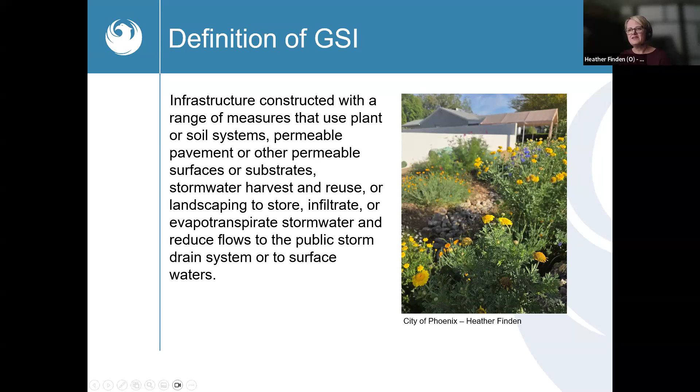Okay, that sounds great, let's go ahead and do this. But what benefit does it provide? Well, it actually provides a whole litany of co-benefits for the area in which it is installed, which are things that we absolutely want to be addressing in and around the city of Phoenix, to respond to our changing environment. First and foremost, it has a variety of environmental benefits. We're going to have more shade that's going to promote cooler localized temperatures.

It's going to help with that urban heat island effect. It's going to improve air quality. And it's going to allow more individuals to get out there and recreate and want to be in these outdoor spaces because it's more comfortable to do so.

For the wildlife in and around us, it's going to be supporting vegetation that's going to attract pollinators, birds, hummingbirds, bees, the monarch butterflies that we want to have. It's going to really promote and support a lot more biodiversity of this wildlife.

And from a water perspective, it can help improve localized flooding. It can help you reduce your reliance on potable water for irrigation, and it can help filter stormwater pollutants that would otherwise be picked up and transported as water runs over these impervious surfaces, down the roads, picking up oils, chemicals, and fecal material, the doggy poo that's not picked up. All of those things—it's really going to help improve that stormwater quality.

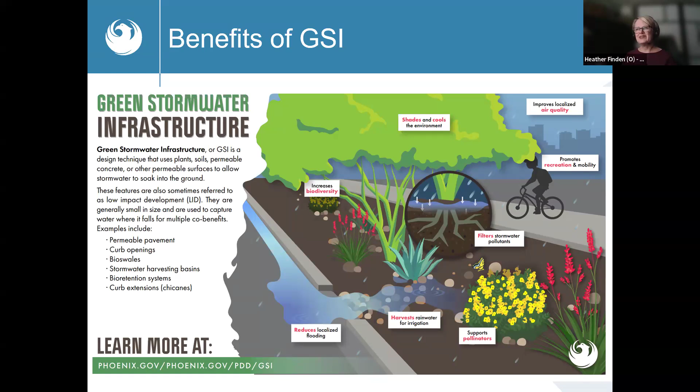Because unlike most other cities, especially on the East Coast, we have a separate stormwater system. The rainwater falls onto the ground, goes into a catch basin, if you're lucky to have those in your neighborhood, and goes into the storm drain pipe and is discharged directly to the Salt River. There is no treatment involved in that at all. So that's why having something like this in place can absolutely have lasting effects, not only on your site, but as it continues on its journey to the Salt River.

So here are the range of measures we are going to be talking about today. I know all of you are probably going to want to say, yes, I want to do it all, but I don't have $50,000 or an endless budget and time, energy, and effort to do that. But that's why they're considered a range of measures.

So what we're going to be looking at today are ways that you can install green stormwater infrastructure or rainwater harvesting systems in and around your home for your benefit. There are going to be two areas that we're going to be looking at: the area that is on your private property, and then another area, especially in some historic districts, that we kind of call a landscape strip.

It's this little detached area between the sidewalk and the road, and again this is more prevalent in some of the older homes. That's more often than not actually considered city right of way—it's under the city's ownership, but it's the residents' responsibility to take care of it. Now, if that wasn't confusing enough, we'll talk about it more. So those are the two areas we're going to talk about when you're looking at water conservation in and around your home.

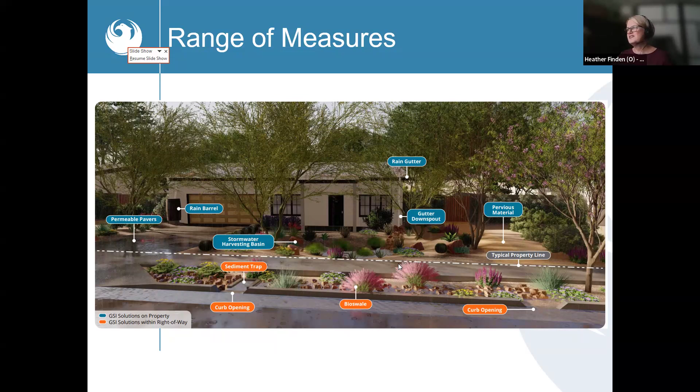Again, I know you said you want to do it all. I can feel it.

But there are some basic questions you can ask yourself when looking to incorporate these in and around your home. Most importantly, what is your budget? How much do you have to spend, how much do you want to spend? You don't have to do it all at one time—these can be projects undertaken over time. And most of them, if not all, are technically do-it-yourself projects, but some of them can be a little bit more tricky, when you might want to hire a contractor to do the work for you.

I am very happy to see that there are a lot more landscape architects becoming more familiar with this, actually reaching out to us at the city to get guidance on ways they can incorporate these features into residential properties they're working on. So that's really exciting. And then again, we're going to look at the space—what do you have to work with?

What we want to do is make sure these features are not directly adjacent to the house. The last thing we want to be doing, especially with some of the soils in and around Phoenix, is to put a lot of water or direct water right next to the foundation of your home. So a general rule of thumb is to have it about 10 feet or so away from structures if we're going to be capturing and allowing water to infiltrate. But these are the best places where the water is going to be falling and running off, so it's a little bit of a dance there.

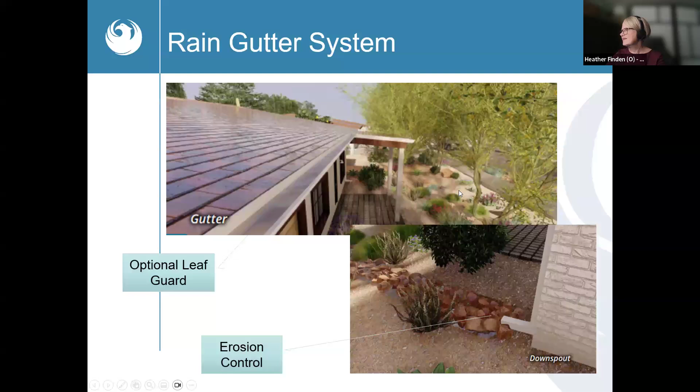Okay, the next one is, I don't want to say it's contentious, permeable hardscapes. One of the key components of green stormwater infrastructure is reducing the amount of impervious surface in and around your home. So instead of having a concrete driveway, concrete walkways, concrete next to an asphalt road, next to a concrete sidewalk, what you're doing is putting in surfaces with small voids in between, or the materials themselves are permeable, which allows water to infiltrate into the ground instead of running off down the site, flooding your yard or going out into the street.

These are really good solutions in smaller areas for retrofit projects, or if you're redoing your landscaping, usually your driveways, patios, areas that are not going to be heavily trafficked. The city does not allow them in the right of way, so that is unfortunately not going to be an option for this one.

But they're really great at reducing pollutants and assisting with flooding issues. So it's generally a very easy solution. You do need to do some preparation, instead of just slapping them down on the ground or subsurface. I could show you some resources on scarifying and disturbing the surface underneath and providing a place for all of that rainwater to run.

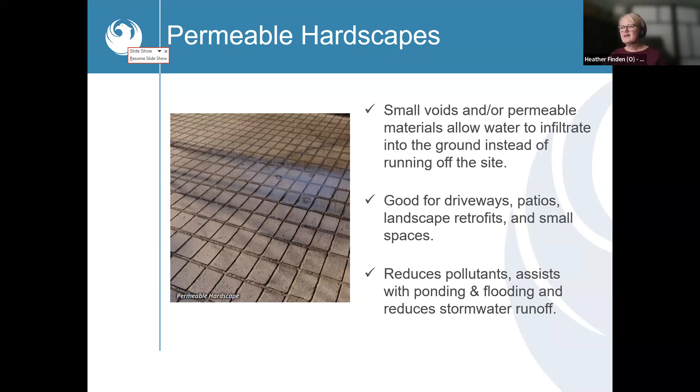So while this is a mock-up, we do have some real world examples. And kind of the neat thing about this is there are so many different options for you, so you can really design it for the area that works for you. Here we have some brick pavers that the water will be going through the voids. You're getting a little more fancy here as we go down to these little, they almost look like an I-shaped brick.

These are some permeable concretes that are typically used in parking lots. You could put that in your driveway. And then you can also have some rocks with concrete stepping stones that are broken up. So really a lot of great options available for reducing that surface on your house. They can be expensive depending on how far you want to go. Some of these higher end, more engineered concretes can be pricey, but it depends on how big of an area you're working with.

It's important with anything that they're maintained appropriately. One of the things that will inevitably cause this to not operate is lack of maintenance. So clearing out those void spaces, sweeping or vacuuming, removing trash, weeds, debris, and other things from those spaces at least once every 6 months is really, really helpful.

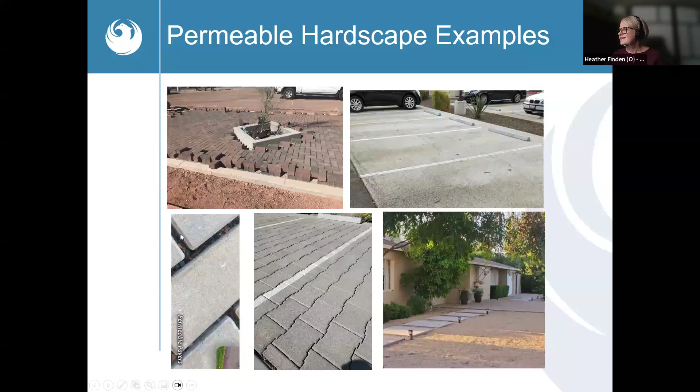Okay, so the next feature we're going to talk about, this is probably something more along the lines of what you were thinking with today, a stormwater harvesting basin. These are going to be shallow depressions that collect rainwater. The picture we showed earlier is when it was coming down the downspout, going into that little rock channel and actually being directed into this stormwater harvesting basin. It needs to be designed so the water is not standing after 36 hours.

Because you really don't want to risk having mosquito breeding, and you don't want to cause a problem with water distribution and have ponding and flooding. This is a really great solution for front yards, backyards, and next to impervious surfaces, so right along a driveway is a great place to put it as well. And it is going to more often than not be vegetated with some really great plants.

You're going to want to not necessarily plant right in the middle here because that's probably going to be the area of most standing water, but you'll have some small plants, maybe some succulents right on the shelf, and even a tree. This is a great way to introduce landscaping into your yard but help reduce your reliance on potable water for irrigation. It's going to help shade and cool your property, improve the air quality in and around your home, provide really wonderful walkable spaces, and reduce the amount of water running off of your property.

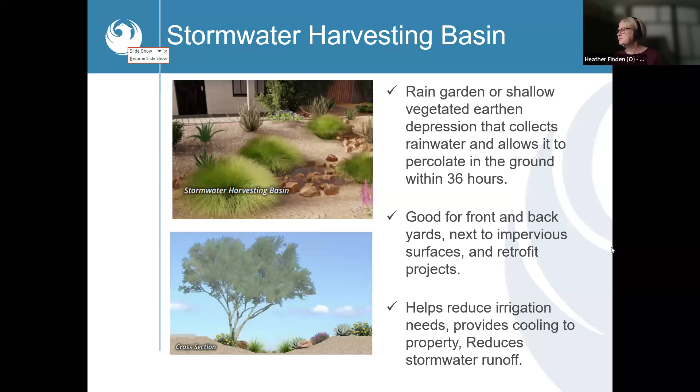Vegetated rock bioswales are also a great option. These are similar to stormwater harvesting basins, but they're open, shallow channels. They're designed for water to run in through a curb opening and travel down the length of the bioswale, watering the plants, and then exiting as well. So this is not meant for that sustained retention.

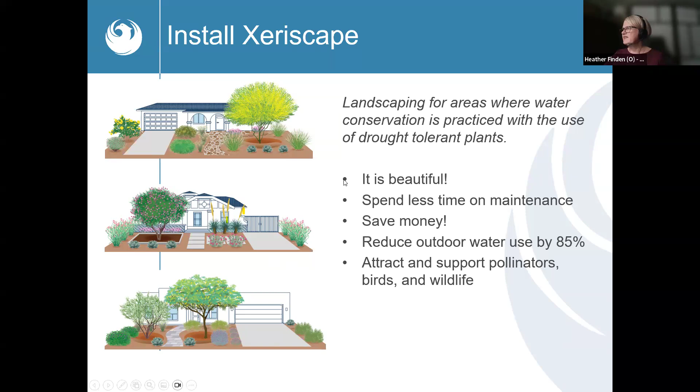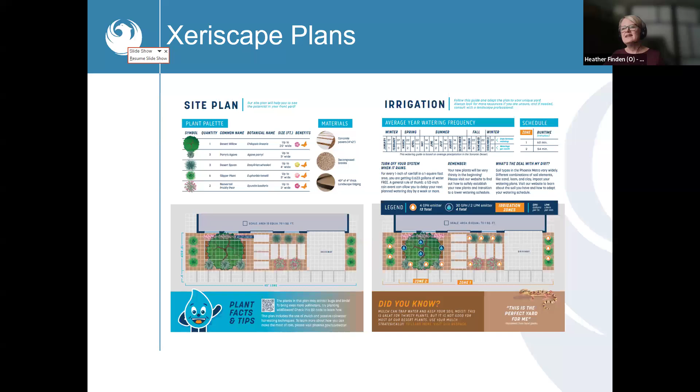These are just going to be lower water usage installations. There's a series of plans the city has developed depending on the size of your property or a particular aesthetic you're looking to achieve. It's almost like a how-to guide - there's plant palettes, layouts, watering schedules, all put together in one place for you. So if you're looking to dip your toe into this, there are resources available to help take out a lot of the guesswork and eliminate the need for a very expensive consultant.

Okay, I don't think I've breathed yet. Let's go ahead and take a breath.

So another project here - we've talked a little bit about removing grass, helping design, let's get some trees in here. We do have a Community Canopy grant program within the City of Phoenix, and it's being managed by our Office of Heat Response and Mitigation. There's some fine print surrounding this, so only certain parts of the city are eligible.

It's going to be in areas that fall under underserved qualified census tracts. There's a map online where you can click and see if your neighborhood or house qualifies. As an individual, you can apply and get trees for your yard, or as a neighborhood you can also apply if you're in those areas - really promoting more walkable, comfortable areas while reducing local temperature, improving air quality in and around your home, and providing shade. This grant is open and available in the City of Phoenix.

To expand a bit, because not everybody is going to be a resident in the city, our utility providers are very good at providing tree programs. They also have some wonderful workshops available if you want to learn more about caring for trees. Our Keep Phoenix Beautiful partners have that too, and there are other agencies - Nature Conservancy, Sustainability Alliance, Trees Matter. There are other mechanisms for you to get trees if you're interested in having native and more drought resistant trees in and around your home.